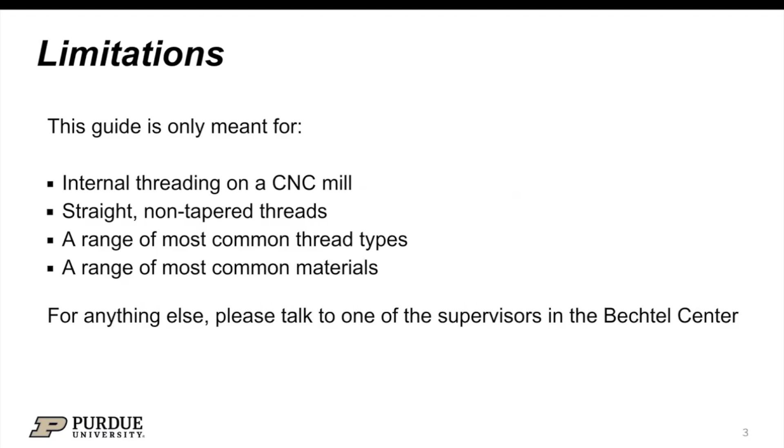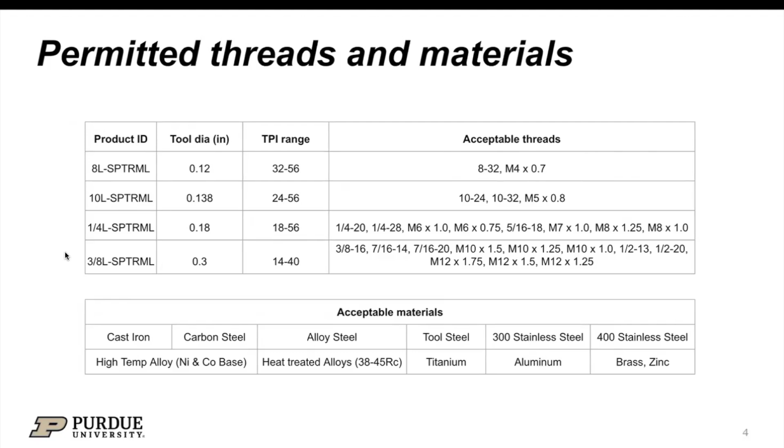Finally, this process will cover a range of the most common thread types and materials, which should be enough for most projects. But if you're making something more unique, you'll again need to talk to a supervisor. As to what exactly those permitted threads and materials are, we've prepared a table to tell you exactly that. Up here, you can see the range of the permitted thread types, and down here, you can see the acceptable materials to go along with those. The table also tells you what exact thread mill cutter you'll be using for each thread.

Moving away from the limitations, thread milling is a machining process that creates threads using a specialized cutting tool called a thread mill cutter. Most of you guys are going to be familiar with tapping, which uses a tool with the exact thread shape to cut threads in one go, going straight down into the hole. Thread milling, on the other hand, is going to use a rotating cutter like this, and it's going to move in a spiral downward, creating your threads. It also allows for more flexibility and better chip control.

Now let's talk about when to thread mill and when to hand tap. Hand tapping is usually going to be fine for softer materials like aluminum, brass, and plastics, especially if you're only making just one or two threads. For harder materials like steel and titanium, you have to keep in mind that a hand tap can break really easily, so thread milling is going to be the preferred method.

If you're also doing a lot of holes, thread milling can save you a lot of time and will usually yield a better result. If you're unsure about which method to use, you can always ask one of the peer mentors in the center. Before we get to thread milling, we'll need to drill a hole that is going to be the correct size.

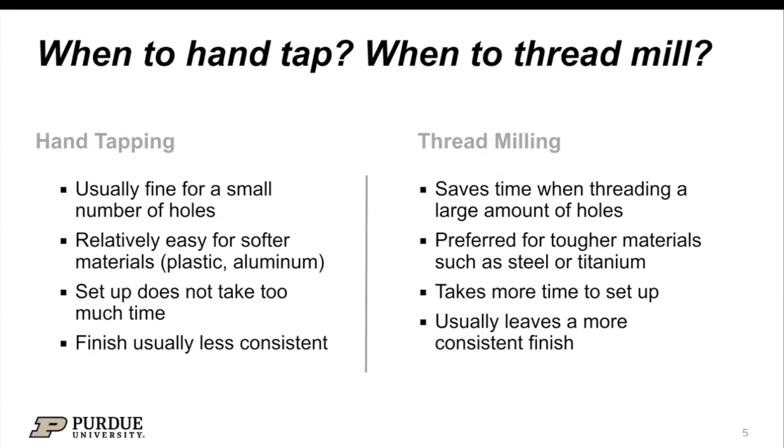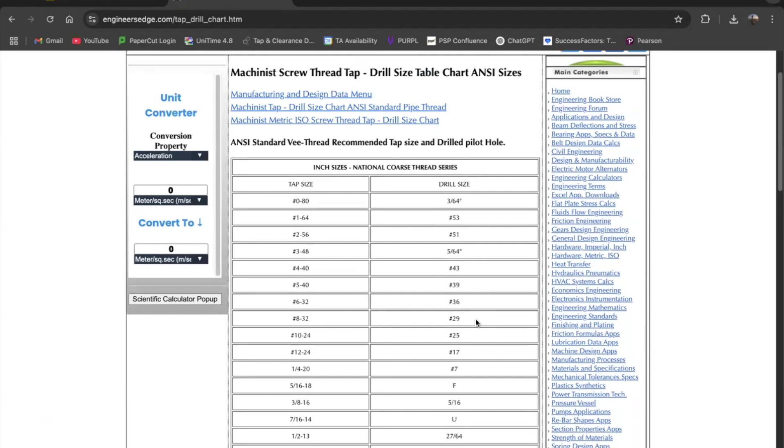To find what exactly the size is, we're going to type out Engineer's Edge tap and drill chart. And here you're going to be able to see a wide range of the most common thread types, as well as the drill size, which is going to determine your correct internal diameter for the thread. In our case, we're going to be doing a 1/4-20 thread. So our drill is going to be a number 7, which if we look up over here, is going to be 0.201 inches in diameter.

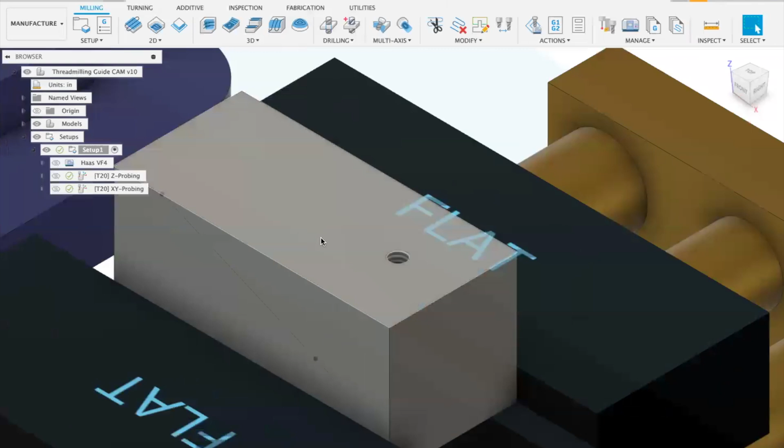Now that we selected the correct drill size, we can go into Fusion to program our toolpath. In this video, I'm going to assume that you already know how to model your stock and model, create a setup, and probe your stock. If you're not sure how to go about doing those, we have other videos on the channel that'll help you with those.

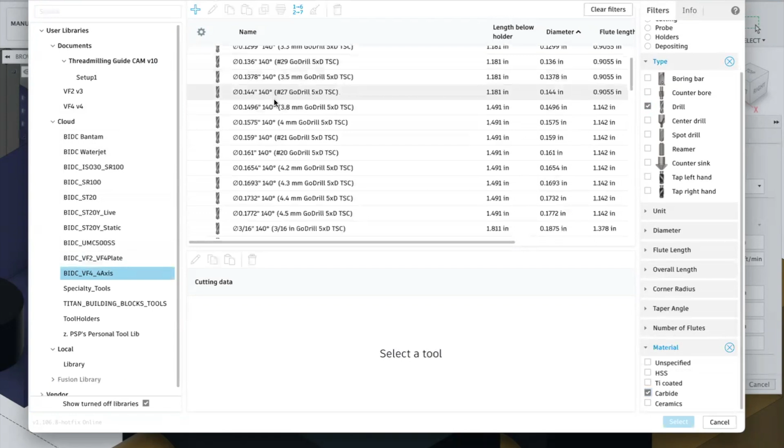To program the drilling toolpath, you're going to go into Drill. We're going to select the machine that your part is on. So in our case, we have VF4. Going to go into Hole Making, Drilling. Material is going to be carbide. And we're going to scroll down to select the number 7. We're doing aluminum, so that's going to be N2.

Hit select. In geometry, we're going to select our hole face. In heights, we're going to do drill tip through bottom. And ensure that cycle is set to rapid out.

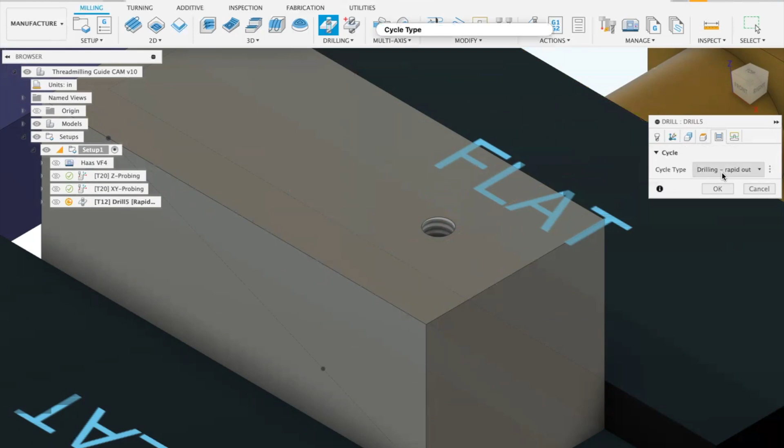Once your hole is drilled, it's time to program the thread milling operation in Fusion. Make sure that if you did include your thread in the model, it's going to be symbolic, so model should be unchecked. The reason why we do this is that it's going to be easier to see what's happening in the simulation afterwards. Now going back to manufacture, we're going to select drill again.

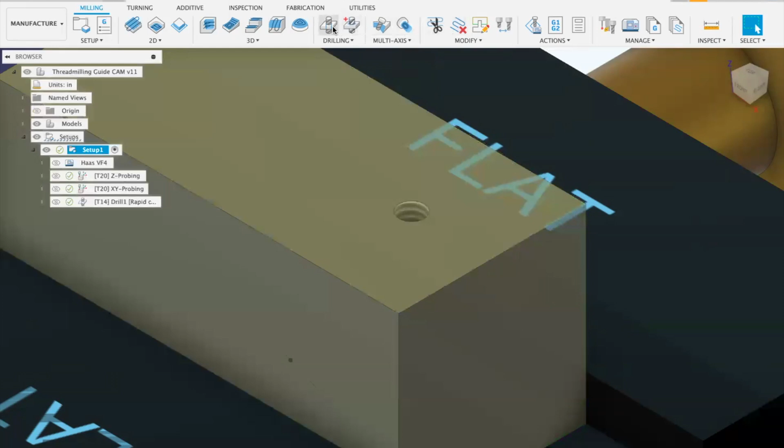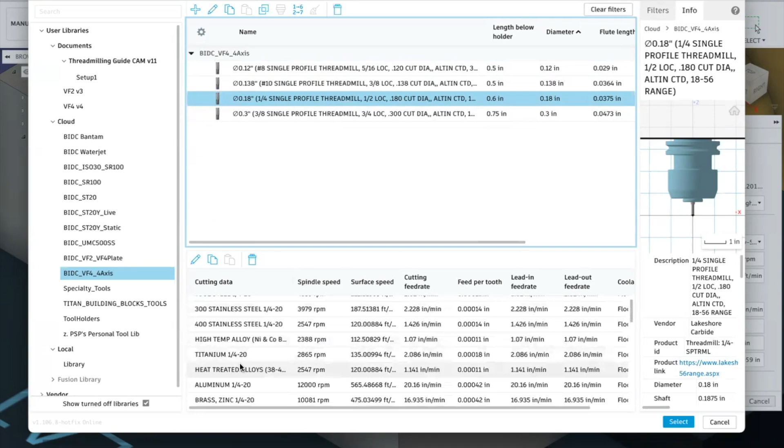For our tool, we're going to go into the machine, select milling, thread mill, and here we're going to see the 4 available thread mills that we have. Now for your operation, you're going to have to go through all of these and see whichever one is going to fit your needs. In our case, it's going to be a 1/4 inch 20, and we're drilling into aluminum, so we're going to select aluminum. That's going to be it for tool.

We're going to go into geometry, where we select our hole face. In heights, we're going to have an adjustment for our hole top. Point one is a good rule of thumb. And what this is going to do is it's going to make it a little easier to verify that our toolpath is correct and it's going above the hole.

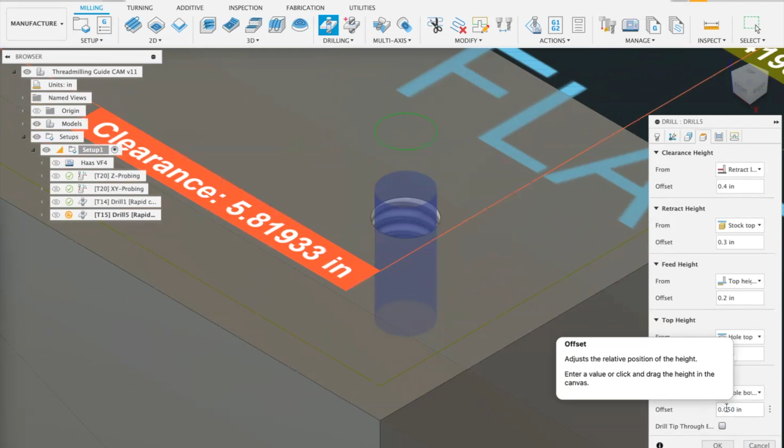For our bottom height, we also want to include an offset of 50 thou would be a good rule of thumb. So we should go that or above. And what that's going to do is it's going to make sure that your tool doesn't plunge into the bottom of the hole. In cycle, we're going to go into thread milling.

Threading, right-handed. If you were doing left-handed, you would talk to a supervisor. Direction should be climb. Pitch is going to be 1 over your TPI for imperial. So in our case, it'd be 1 over 20. If you were doing a metric pitch, then you would simply type out 1 millimeter directly, or like an M6 times 1.

For your diameter, we're going to say it's going to be your major diameter, so 0.25. We're going to enable multiple steps, and we're going to select 4. For our step over, we're going to type out our major diameter minus our drill diameter. So in our case, it's going to be 0.201 for a number 7, divided by 2, because this is a radial measure, not a diametrical one, and then divide that by 4, because we have 4 step overs.

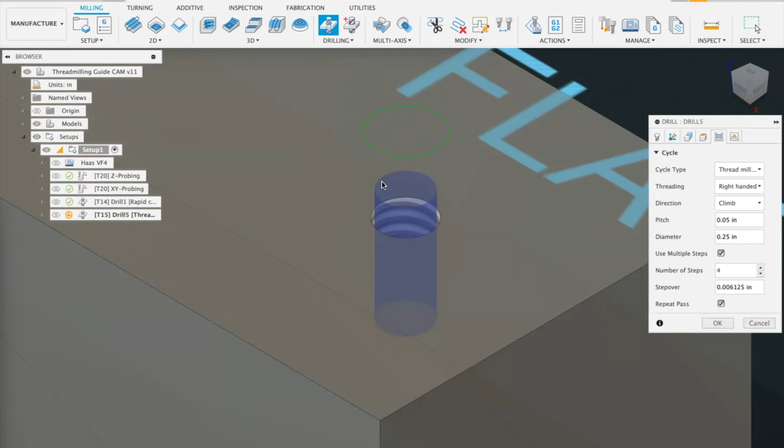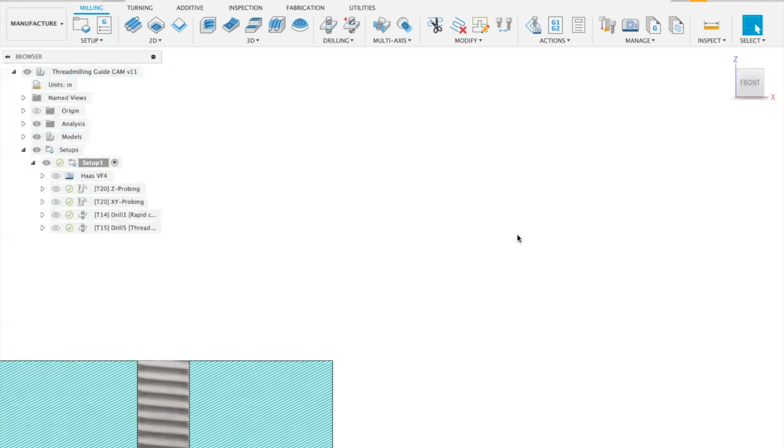I'm going to include a repeat pass, which is going to do a finishing pass and smooth out our threads. Now we can hit OK. Once you've made all your selections, you always want to verify your toolpath. First, we're going to apply a section analysis, and I'll set it by the appropriate distance. Now we're going to select the front view, select the 2 operations that we just did, and hit simulate.

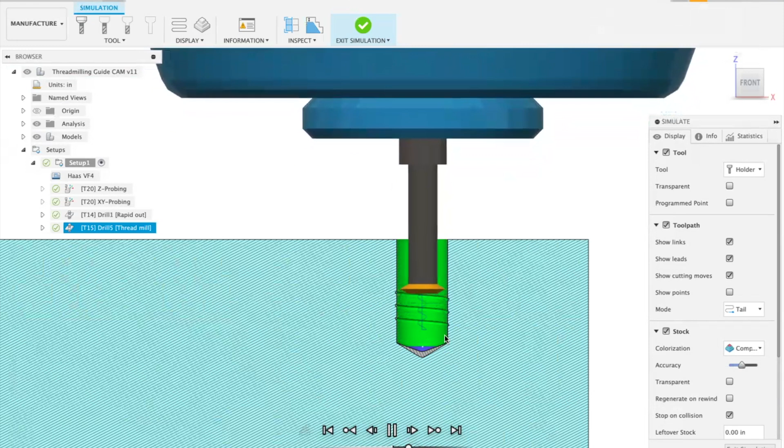Here, we're going to be checking that our drilling is only going the distance that we need. And on the threading, we're going to be checking that our cutter is going to start above the hole bottom, which happened here, so that's correct. And it should always be ending above the hole top, which again is happening here. We're also checking that the step over doesn't seem too aggressive and it's going to be cutting the thread continually.

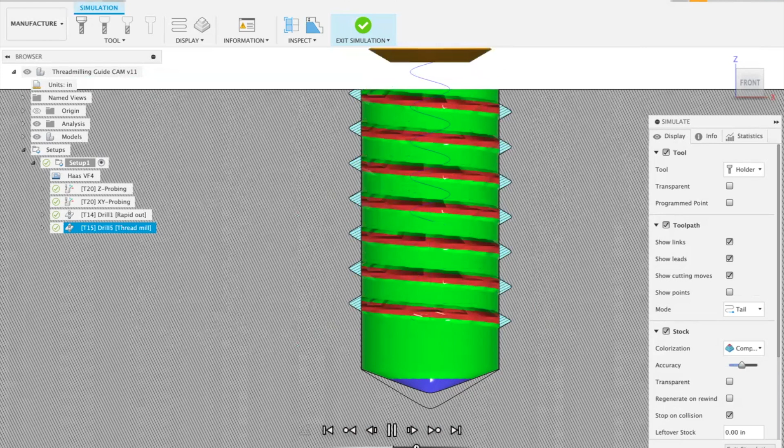Now your final cut is going to be a finishing one, so this is not going to be a visible step over. You should not be seeing any collisions at any point of this simulation. This is going to conclude the CAM section guide.

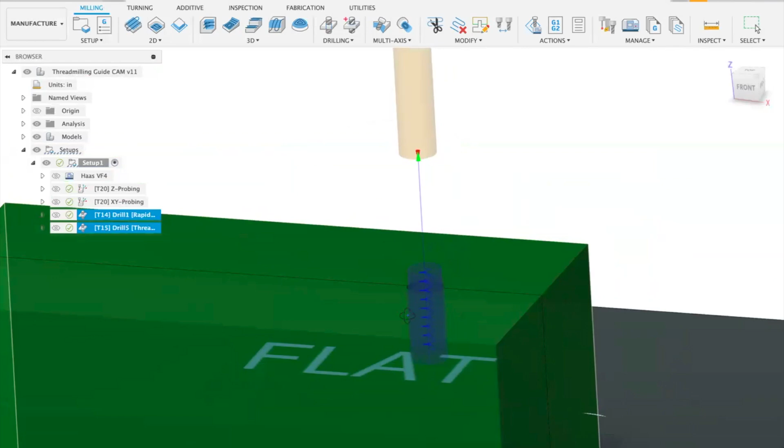Now I have one final note before this video ends, and that's that once you have a reservation and come into Bechtel to mill your thread, it is advised that you bring your bolt or fitting or whatever you're doing with you so that you can test out your fit. With the settings given, it's likely that your bolt or fitting will not fit on the first try, and you will need to increase your diameter in the settings to ensure fit.

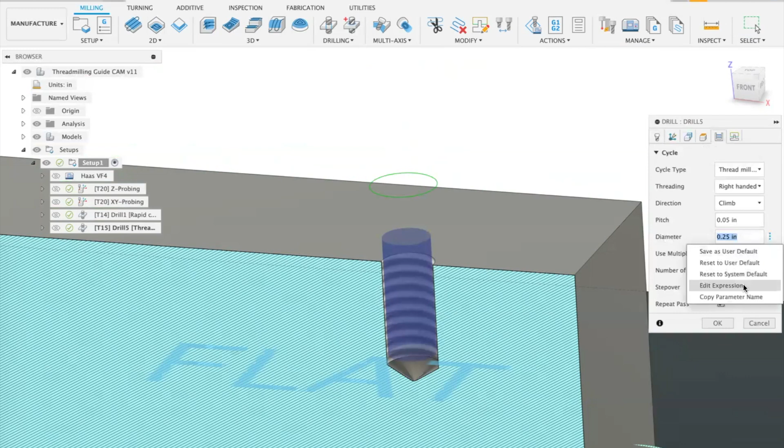So the way you go about doing that is you select the drilling, and in your diameter, you would increase that by, let's say, 1 thou. Now you'd repost that, and then you would see if it fits. If it does not, increase by 1 thou again, 1 thou again, and you're going to repeat that until your bolt fits.

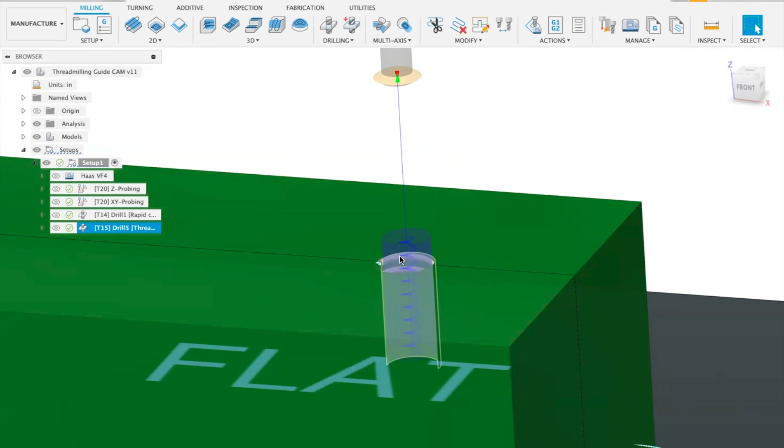Be careful, the transition between the bolt not fitting and being loose can be as small as 2 to 3 thou. So that's going to be a very fine increment. Make sure that you don't remove the part before your fit is checked, because otherwise you will not be able to find that thread again. All right, that's going to be everything that I wanted to talk about in this guide.